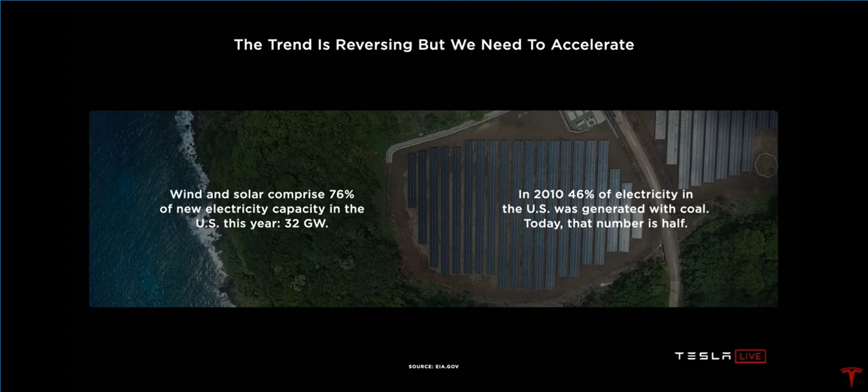So in terms of Tesla's contribution, we've delivered over 1 million electric vehicles, 26 billion electric miles driven, and many gigawatt hours of stationary batteries, 17 terawatt hours of solar generated. So I think solar is sometimes underweighted at Tesla, but it is a massive part of our future.

The three parts of a sustainable energy future are sustainable energy generation, storage, and electric vehicles. So we intend to play a significant role in all three. So to accelerate the transition to sustainable energy, we must produce more EVs that need to be affordable and a lot more energy storage while building factories faster and with far less investment.

So goal number one is a terawatt-hour scale battery production. So tera is the new giga, and a terawatt is 1,000 times more than a gigawatt. So we used to talk in terms of gigawatts. In the future, we'll be talking in terms of terawatt hours.

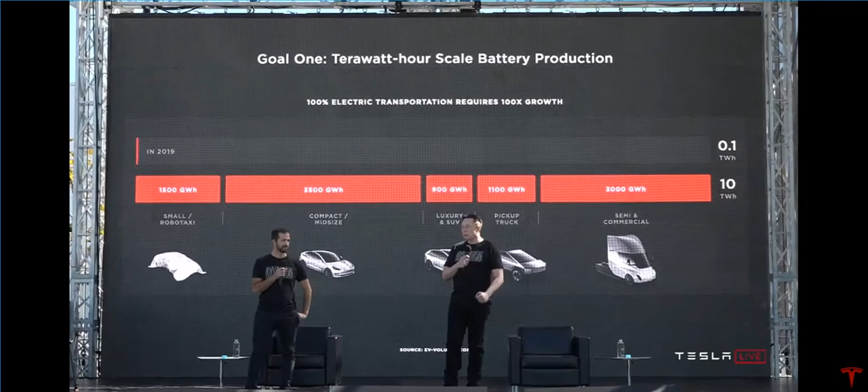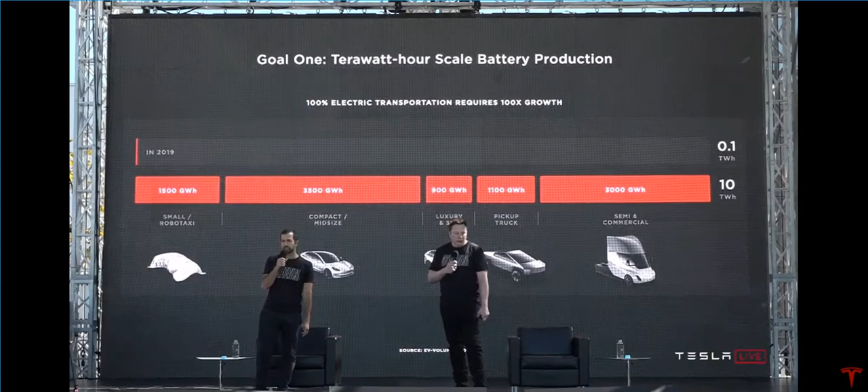So this is what's needed in order to transition the world to sustainability. Yeah, and you can see we're talking about 100x growth in batteries for electric vehicles to achieve this mission. And we are going to get there. It's just a matter of how fast, and our intention is to accelerate it.

Yeah, you basically need on the order of roughly 10 terawatt hours a year of battery production to transition the global fleet of vehicles to electric. And the average vehicle lasts 15 years, so we're talking about 150 terawatt hours, give or take, to transition all vehicles of all types to electric. Yeah, so it's a lot of batteries, basically.

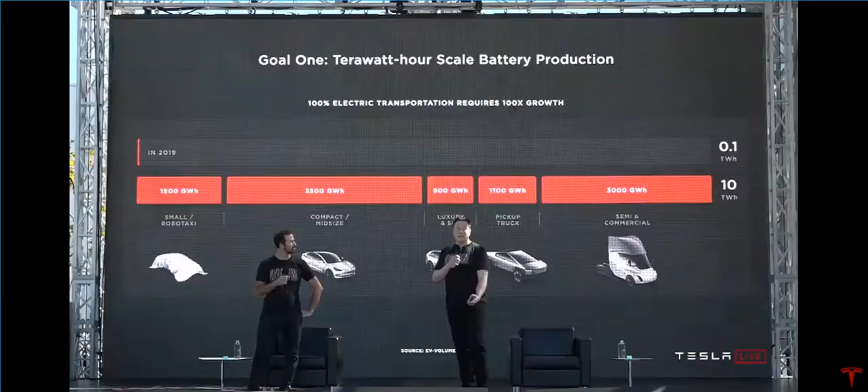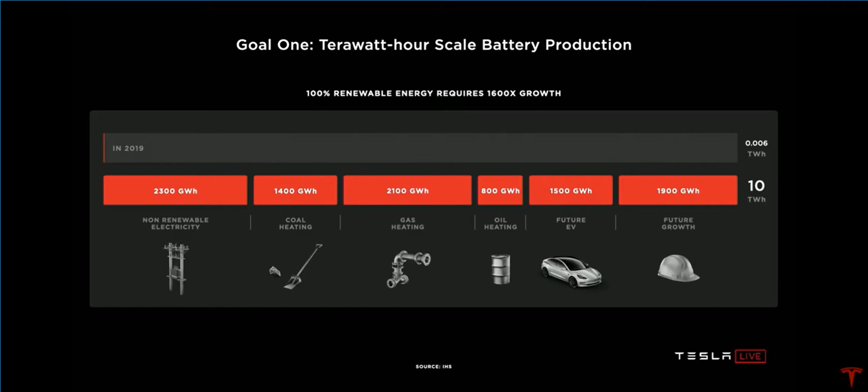And then on the grid side, we have a similar mountain to climb, 1,600 times growth from today's grid batteries to go 100% renewable on the grid and to take all of the existing heating fossil fuel uses in homes and businesses 100% electric.

And this number, I think, might grow even more, as the world economy matures and as countries with high populations industrialize, we could see this number be even more. But let's say it's like roughly 20 to 25 terawatt hours per year, sustained for 15 to 25 years to transition the world to renewable. This is a lot.

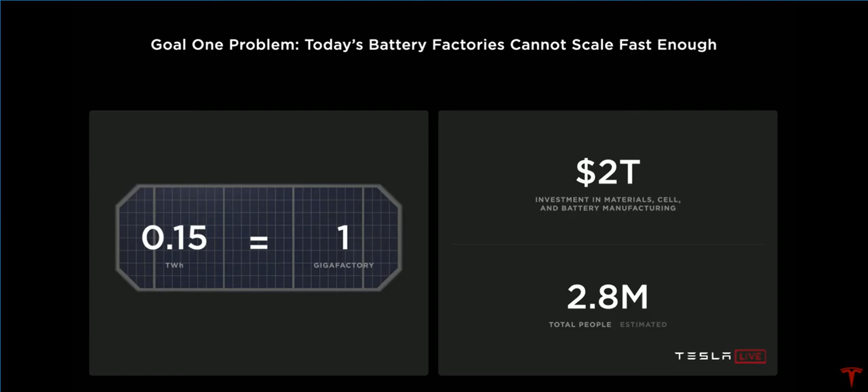So today's battery factories cannot scale fast enough. They're just too small. For Giga Nevada, 150 gigawatt hours per year is like what we probably expect to make out of there. But this is really pretty small in the grand scheme of things. That's only 0.15 terawatt hours.

And they cost too much. We would need 135 fully built-out Nevada gigafactories to achieve 20 terawatt hours a year. It's not scalable enough of a solution. We need a dramatic rethink of the cell manufacturing system to scale as fast as we can and should.

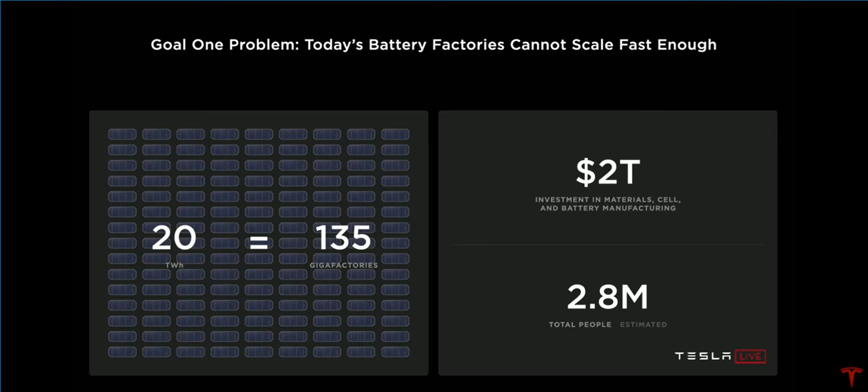I think we should view this as more than just a question of money. Money is sort of an ethereal thing, but it's really the amount of effort. You have a certain amount of effort, in terms of people and machines, and depending on how efficient that effort is, for a given amount of effort, you want the most amount of batteries. So it's not just a question of like, if we had $2 trillion, tomorrow you could make this. It's not that easy. You actually need to organize a massive number of people, build a lot of machines, build the machines that make the machines. And so it's incredibly important to have that effort yield the most number of batteries.

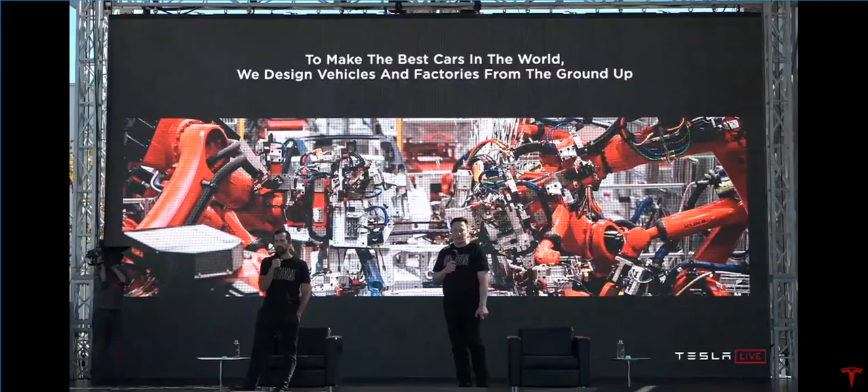To make the best cars in the world, we design vehicles and factories from the ground up. And now we do this for batteries as well.

It's weird, the slides don't show up quite right. Anyway, what shows up on the screen is not quite what shows up there. Oh, okay, it's different. Yeah, I think it's because that one's supposed to be current. Anyway, so let's get started.

We have a plan to halve the cost per kilowatt hour.

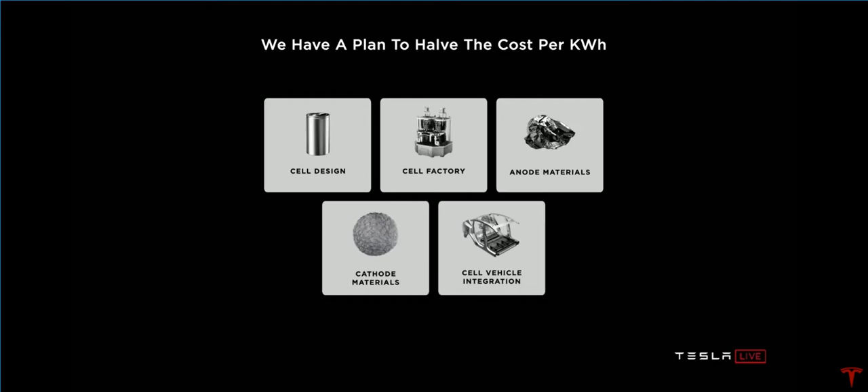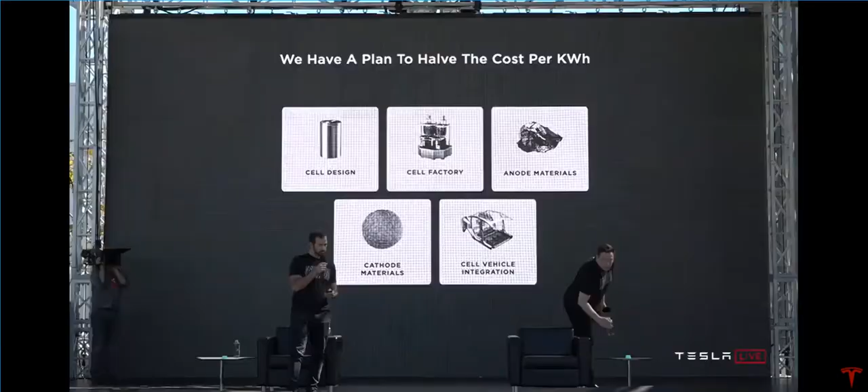And it's not a plan that rests on a single innovation, some research project that'll never see the light of day. It's a plan that has taken creative engineering and industrialization across every facet of what makes a cell into a battery pack, from raw material to the finished thing. And we're going to go through that plan with you today, step by step, and build up how we get to these goals and how we accelerate this transition and make our vehicles and our grid batteries more affordable.

We basically thought through every element of the battery, well, almost every element. There are a few more elements that we won't get to today, but we will get to in the future.

So first, before we get too far into it, let's talk about what is in a battery cell. We've got the cap and the can, negative and positive terminals of the cell. When you open that cell, you've got a tab connected to those terminals, what we call the jelly roll, which is the wound electrodes on the inside. You can actually see what this looks like as you unwind it. This is over 1 meter long in a typical 2170 cell, so it's quite a long winding process. And you can see the tab still there.

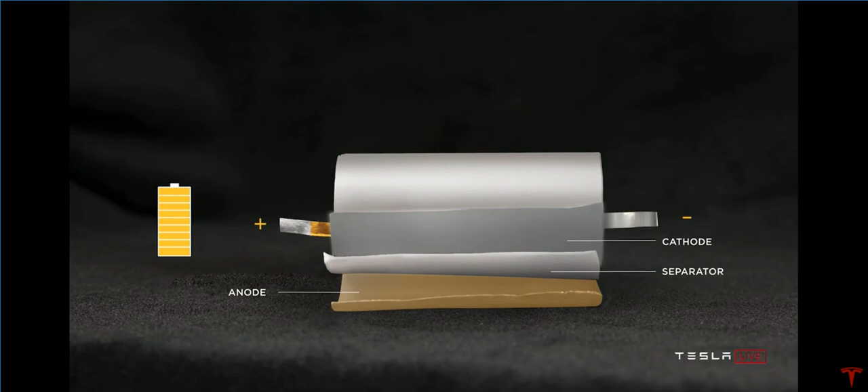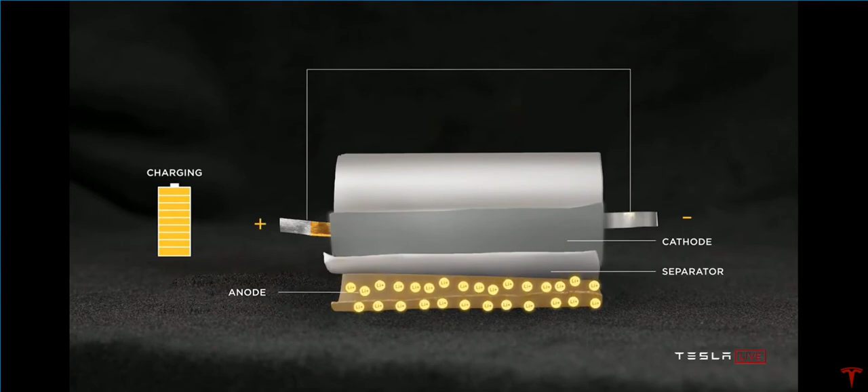To explain what's actually going on here, we've identified we've got anode, cathode, separator, positive and negative terminal. Watch what happens as we discharge the cell. Lithium moves from anode to cathode, and then the reverse: when we charge the cell, lithium moves from cathode to anode across the separator. This is the basis of what makes all lithium-ion batteries, no matter what the form factor is.

And when we look at what's happened to date, at least in our products, we've moved from the 18650 form factor to the 2170 form factor through great collaboration with our partners, Panasonic, new partners like LG and CATL, and probably others in the future.

Actually, a slight note on why it's called the 18650 versus the 2170: the first two digits refer to the diameter, and the second two digits refer to the length. That helps explain these weird numbers. But nobody could explain to me why there was an extra zero, so I said, okay, we're deleting the zero nobody can explain in future form factors. So technically it's the 21700, but going forward it's the 2170 because we just got rid of the extra zero since it's pointless.

This was an evolutionary step going from 1865 to 2170, bringing 50% more energy into the cell. But when we look to the ideal cell design, if we were to do it ourselves, we need to go beyond just what's in front of us and study the full spectrum of options.

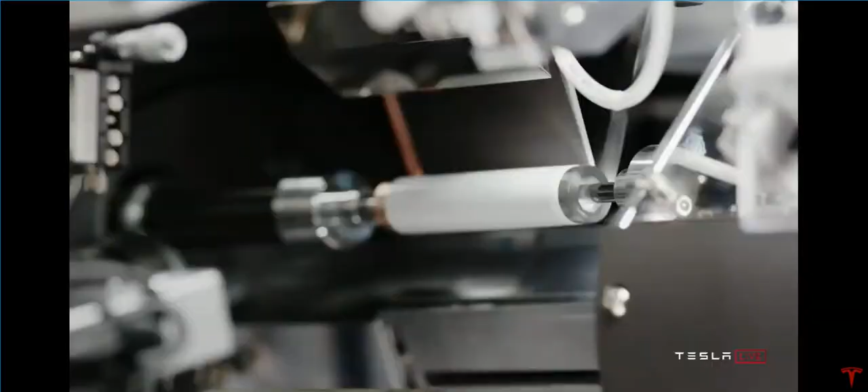I want to stress, this is not just a concept or a rendering. We are starting to ramp up manufacturing of these cells at our pilot 10 gigawatt hour production facility just around the corner. Here's a video of some of what's going on in the plant.

To be clear, it will take about a year to reach the 10 gigawatt hour capacity. This is important to appreciate - when you build a factory, there's a certain capacity that you design to, and then it takes some period of time to actually achieve that capacity. So I'd say it's probably about a year before we get to the 10 gigawatt hour annualized rate with the pilot plant. And this is just a pilot plant - the actual production plants will be more on the order of maybe 200 gigawatt hours, maybe more over time.

Let's stack up everything we just saw at the cell level. Just the cell form factor change enables a 14% dollar per kilowatt hour reduction - just that cell form factor change. And now that you've been teased on this factory, we're going to walk step by step through that factory and discuss a series of innovations there.

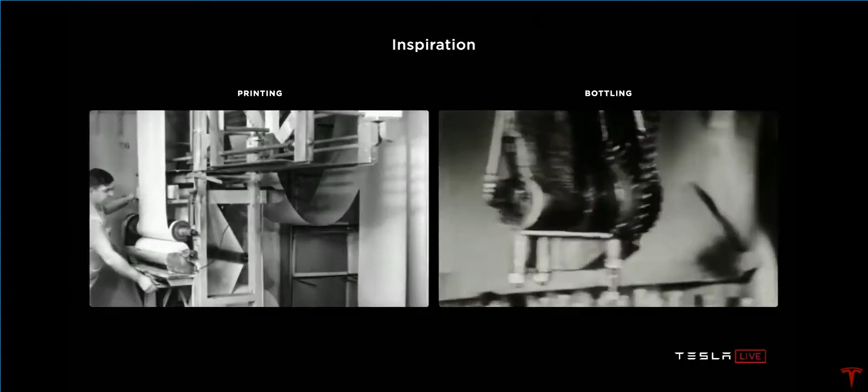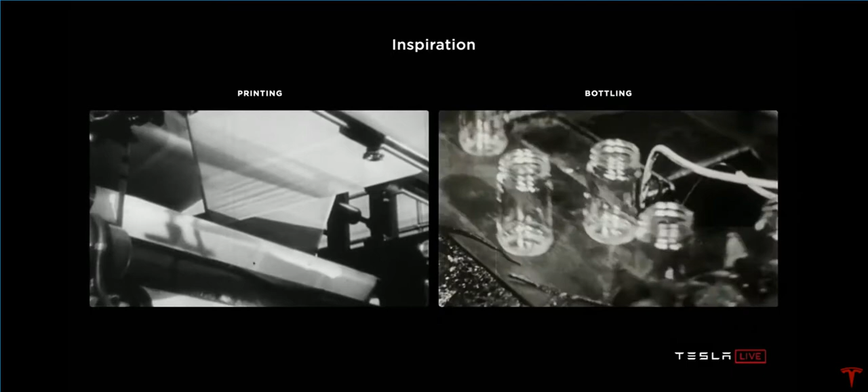When thinking about the ideal cell factory, we have inspirations behind us in the paper and bottling industry, where from humble beginnings, over a century of innovation has enabled mass scale, continuous motion, unbelievably low manufacturing cost. The lithium-ion industry, which is really only in its 3rd decade of high-volume production, has so far to go to achieve similar scale and simplicity. That was the inspiration we set out to the team as we thought about how to marry cell design and manufacturing in the best possible factory.

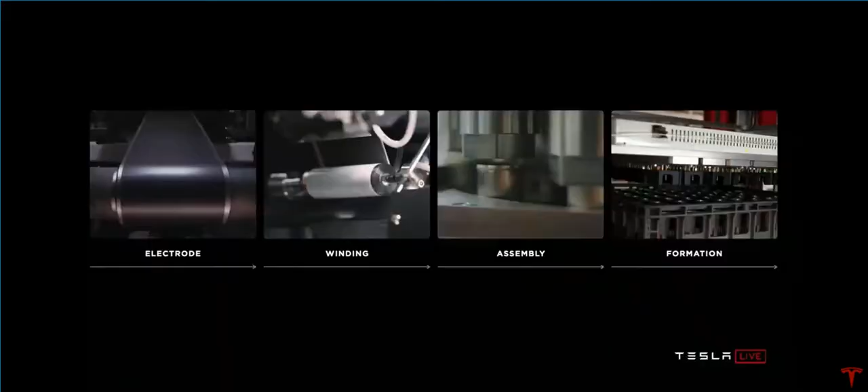Let's talk a little bit about what's in a cell factory. First, there's an electrode process where active materials are coated into films onto foils. Then those coated foils are wound in the winding process we just talked about, where if you do have tabs, you have to start and stop a lot. Then the jelly roll is assembled into the can, sealed, filled with electrolyte, and sent to formation, where the cell is charged for the first time, the electrochemistry is set, and the quality of the cell is verified. We set out at every step of this process to take that inspiration and think about how we make those processes fundamentally better and more scalable.

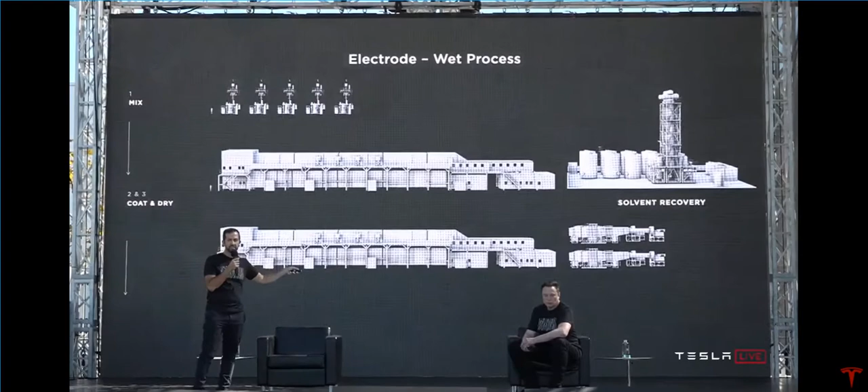One of the most important processes is where it all begins, the wet process of electrode coating. Just to give you a sense of scale, I'll walk through what's in that wet process. You've got mixing, where the powders are mixed with either water or solvents for the cathode. That mix goes into a large coat and dry oven, where the slurry is coated onto the foil - huge ovens, tens of meters long - dried, and that solvent then has to be recovered. You can see the solvent recovery system. Then finally, the coated foil is compressed to the final density. When you're looking at this, you think, wow, that's a lot of equipment for one step, especially when you consider that little speck next to the coating oven is a person. This is serious iron involved in making batteries.

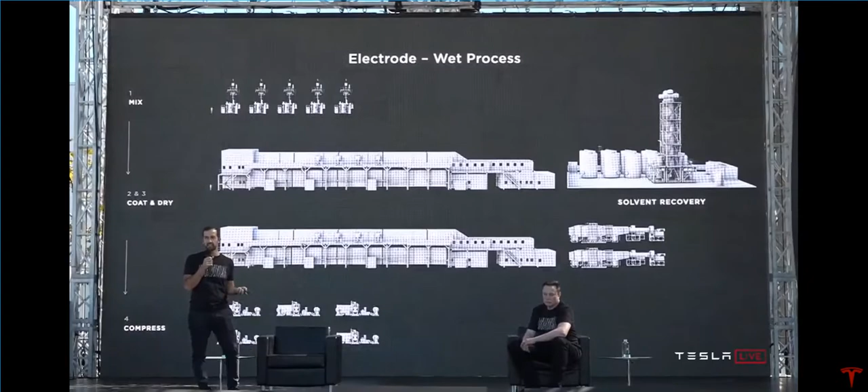Wouldn't it be great if we could skip that solvent step, which is one of those dig-a-ditch-and-fill-it-in kind of things, where you put the solvent in and then take it out and recycle it, and just go straight to dry mix to coat? That's what the dry process is really about. In its most basic form, you can see it here on a bench top - literally, powder into film, as simple as that. I mean, it's hard, actually, to be clear. If this was easy, everyone would do it. So it's not like dry coating electrode is actually easy.

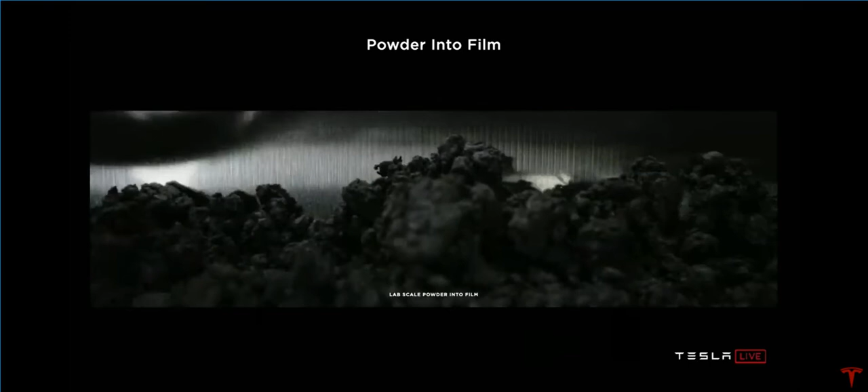It's actually very hard to do what appears to be a simple thing. And it's worth noting, we did acquire Maxwell a little over a year ago. It's certainly a good company, but the dry coating they had was sort of, I would call, proof of concept.

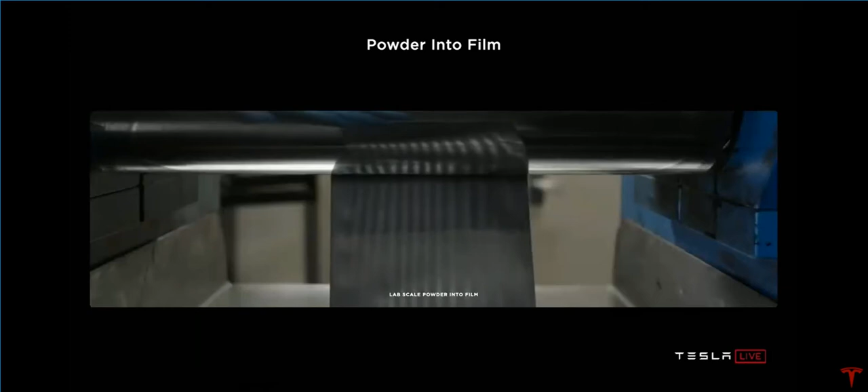Since the acquisition, we've actually revved the machine that does the dry coating 4 times. So we're on revision 4 post-acquisition, and there's still a lot of work to do. I would not say this is completely in the bag. As you go from benchtop to lab to pilot to volume production, there are major issues you encounter at every level. It's not like you make something work on your bench and bingo, now you can make a bazillion of it.

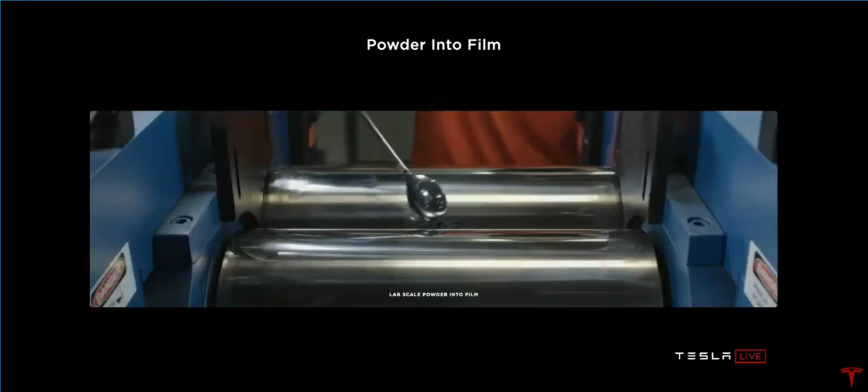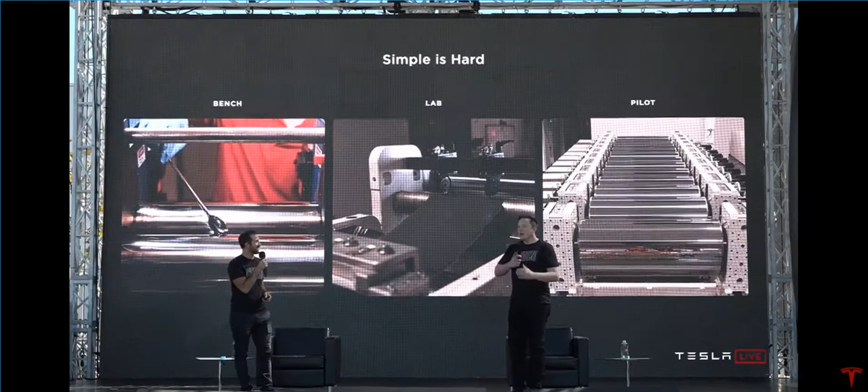I would like to not say that right now it's just totally working. It's close to working, but even now, at the pilot plant level, it's not quite there. Well, it's fair to say it does work, but with not a high yield.

We're still ironing out the kinks, but we've made tens of thousands of cells, thousands of kilometers of electrode. We're on the 4th generation of the equipment, so we've learned a lot along the way.

It's super demanding because every atom has its place if you want to deliver the energy density, the cycle life, and the supercharging. But we're confident we will get there, though it will be a lot of work along the way. There's a clear path to success, but a ton of work between here and there.

But this is a really profound improvement. For people that know battery manufacturing, this is gigantic. We'll probably be on machine revision 6 or 7 by the time we do large-scale production. The rate at which the machines are being improved is extremely rapid, like literally every 3 or 4 months is a new rev. And beyond the electrode, we continue to innovate on every other process step.

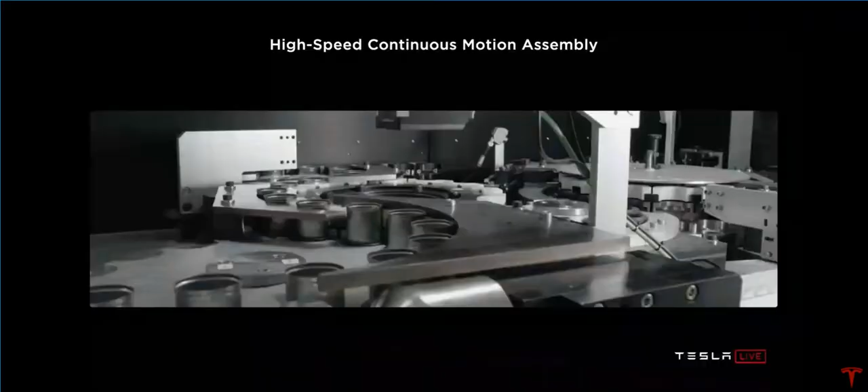So let's talk a little bit about assembly, which is next. The key to a high-performing assembly line is accomplishing processes while in continuous motion, thinking of the line as a highway: max velocity down the highway, no start and stop, no city driving. Exactly, no stoplights or traffic lights. You want the highway. I want the highway.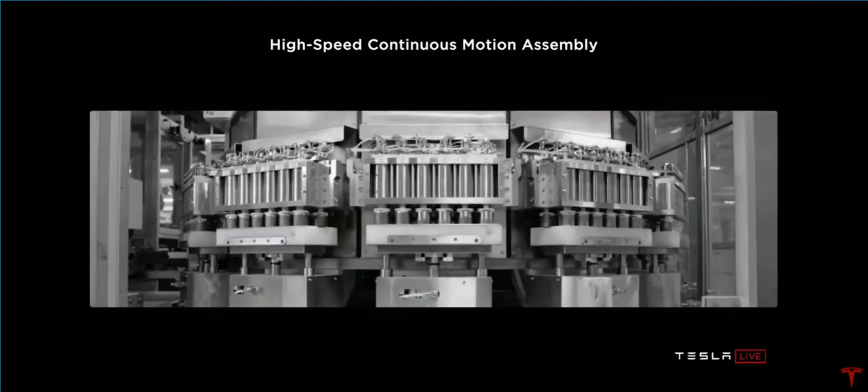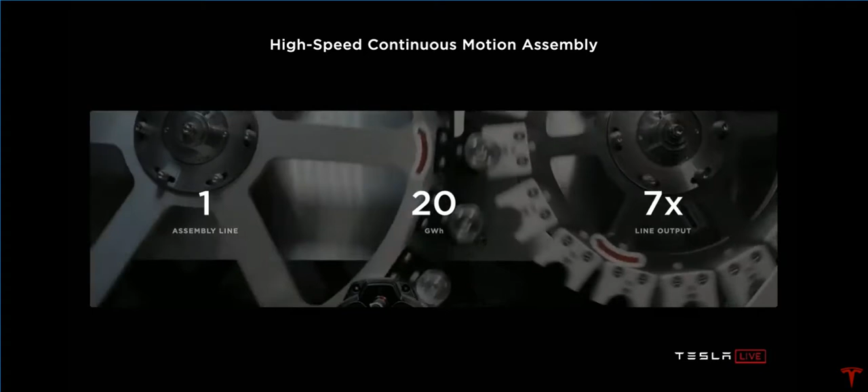Together with our internal design team that makes and designs this equipment, we coupled thinking about how to make the best cell with thinking about how to make the best equipment, so we could accomplish the fastest parts per minute rates on all of these tools. Through all of that development, we were able to implement assembly lines where one line achieves 20 gigawatt hours, a 7 times increase in output per line. When you're thinking about scalability and pure effort, having one line be 7x the capability is just effort multiplying.

You can think about the fundamental physics of a factory. It's actually quite a lot like the rocket equation, where you've got your exhaust velocity and the log of the start to end masses. So it's basically saying, how fast are things going, and what percentage of the factory volume is doing useful work. Conveyance does not count as useful work.

Only the value-added steps count. If you break the factory down into cubic meter sections, or smaller, like 1 liter sections, and ask, is a majority of this volume doing useful work, you would be astounded at how bad most factories are. They're like maybe 2 or 3%, including our factory in Fremont. I think it's possible to get to at least 10 times that volumetric efficiency, more like 30% ish, maybe more, and be 10x better, which means the factory can be 10 times smaller.

And then the other thing is, how fast are things going through the factory. It's like speed and density.

The faster you go—like if a factory that's moving at say twice the speed of another factory is equivalent to two factories basically—the company that will be successful is the company that with one factory can accomplish what other companies take 2 or 3 or 4 factories to do. So this is what we're trying to do here: how do we with one factory achieve what maybe 5 or even 10 factories would normally be required to achieve?

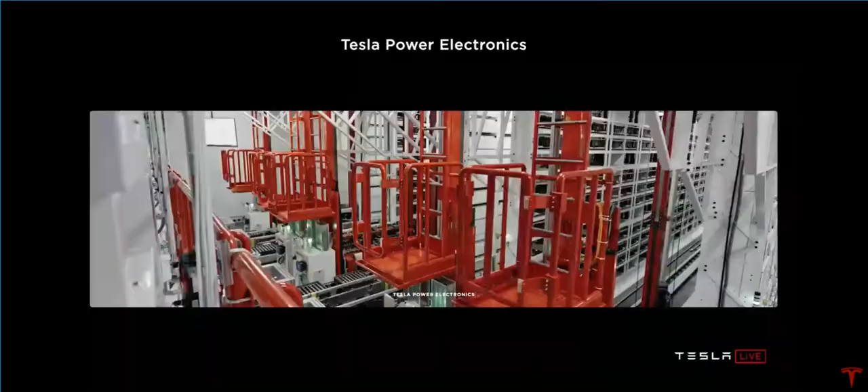Okay, now let's talk about formation. In a typical cell factory, formation represents 25% of the investment. And what is formation? It's charging and discharging cells and verifying the quality of the cell.

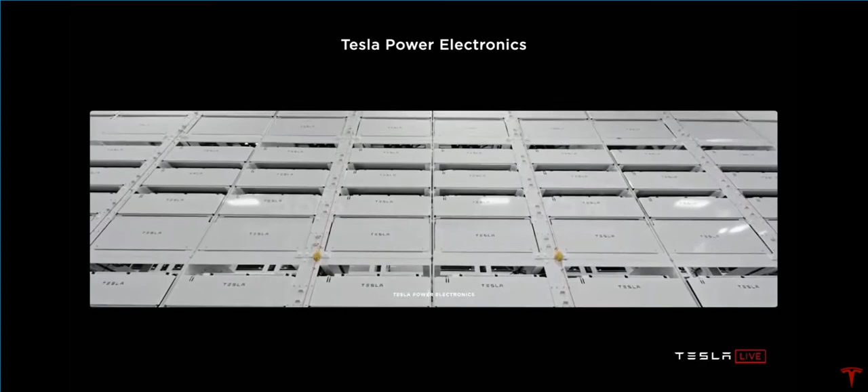Turns out we've charged and discharged billions and billions of cells in our vehicles, so we know a thing or two about that. The typical formation setup is you charge and discharge each cell individually. In our car, we charge thousands of cells at once. And we took our principle and our power electronics, leveraging Powerwall, vehicle battery management systems, and others, to dramatically improve the formation equipment cost effectiveness and density—86% reduction in formation investment, 75% reduction in footprint.

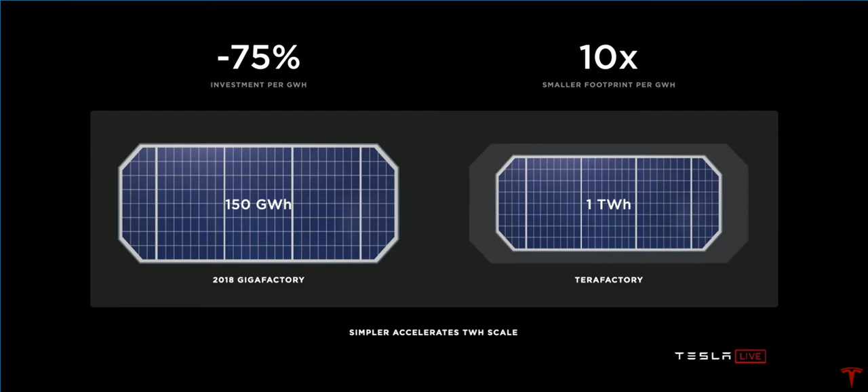Essentially, what this translates to, based on what we know today, is about a 75% reduction in the investment per kilowatt hour or gigawatt hour. It's just basically 4 times better than the current state of the art, to the best of our knowledge. And I think there's probably room to improve even beyond that. Definitely, yeah.

We're able to, from a volume standpoint, actually get, in a smaller form factor than Giga Nevada, many times the cell output. So you can see, basically we can get a terawatt hour in less space than it took to make a gigawatt hour—150 gigawatt hours. So this is pretty profound. I would actually not have thought this was possible several years ago, that we could actually get to terawatt hour scale in less space than what we currently envision for doing 150 gigawatt hours. So yes, simpler accelerates terawatt hour scale, and that's what we need to do to accelerate our mission.

And as Elon said, we're going to try to even improve on this as we push towards our goals. This is just talking about Tesla internal cell production. As I tweeted out earlier, we will continue to use our cell suppliers, Panasonic and LG and CATL. And so this is 100 gigawatt hours supplemental to what we buy from suppliers.

Essentially, this does reduce our weighted average cost of a cell, because it allows us to make a lot more cars and a lot more stationary storage.

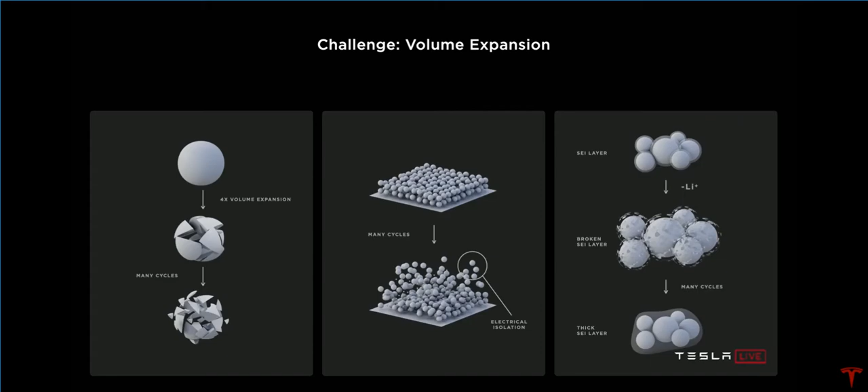The main reason is because the challenge with silicon is that it expands 4x when fully charged with lithium. Basically, all of that expansion stress on the particles starts cracking them, they start electrically isolating, you lose capacity, the energy retention of the battery starts to fade, and it also gums up with a passivation layer that has to keep reforming as the particles expand. Basically, with silicon, the cookie crumbles and gets gooey. That's basically what happens. Good analogy.

Current approaches to solve this, which exist—I mean, we have silicon in the cars you're all in right now—involve highly engineered, expensive materials in the scheme of things. Now, they're still great, and they enable some of the benefits of silicon, they just don't enable all of it, and they're not scalable enough. You can see some of the things you've maybe heard of, SiO, silicon with carbon, or silicon nanowires. That's kind of the space right now.

What we're proposing is a step change in capability and a step change in cost. And what that really is, is to just go to the raw metallurgical silicon itself. Don't engineer the base metal, just start with that and design for it to expand in how you think of the particle in the electrode design and how you coat it.

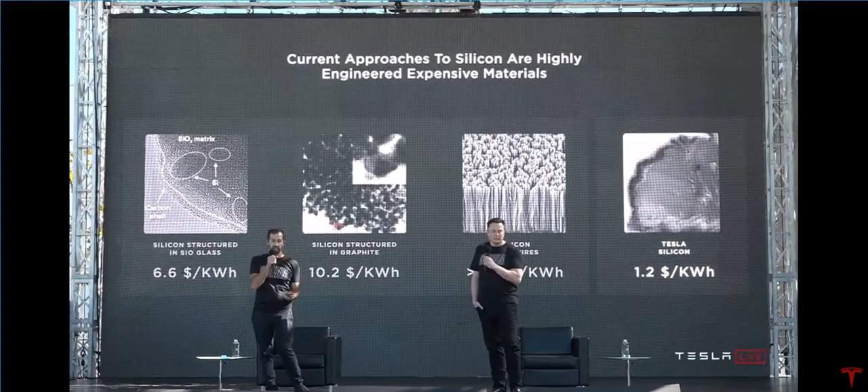I'm not sure if you saw this—basically, $1.20 per kilowatt hour. If you use simple silicon, it's dramatically less than even the silicon that is currently used in batteries made today, and you can use a lot more of it. The anode would cost, with this silicon, $1.20 a kilowatt hour.

And how does it work? Start with raw metallurgical silicon, stabilize the surface with an elastic, ion-conducting polymer coating that is applied through a very scalable approach—no chemical vapor deposition, no highly engineered high capex solutions—and then integrate it into the electrode through a robust network formed out of a highly elastic binder. In the end, by leveraging this silicon to its potential, we can increase the range of our vehicles by an additional 20%, just from this improvement. It gets cheaper and longer range.

When we take that anode cost reduction, we're looking at another 5% dollar per kilowatt hour reduction at the battery pack level. And there's more.

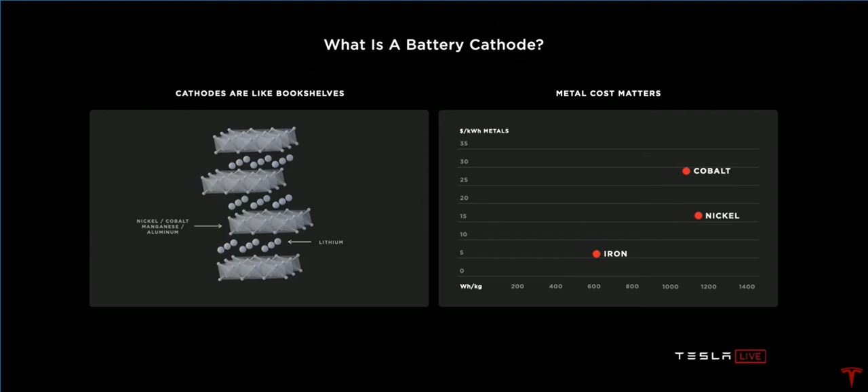Let's talk about cathodes. What is a battery cathode? Cathodes are like bookshelves where the metal—the nickel, the cobalt, the manganese, or aluminum—is like the shelf, and the lithium is the book. Really, what sets apart these different metals is how many books of lithium they can fit on the shelves and how sturdy the shelves are.

Cobalt is... it's tough to figure out exactly the right analogy to explain cathode and anode, but a bookshelf is probably a pretty good one, in the sense that you need a stable structure to contain the ions. You want a structure that does not crumble or get gooey, that holds its shape in both the cathode and the anode. As you're moving these ions back and forth, it needs to retain its structure. If it doesn't retain its structure, then you lose cycle life and your battery capacity drops very quickly.

People are always talking about what the cathode is going to be—is it NCA or whatever? The thing to consider is just fundamentally what the metals are capable of, and that's what we have on this chart: dollar per kilowatt hour of the cathode, just the metal using London Metal Exchange prices, versus the energy density of just the cathode. You can see nickel is the cheapest and has the highest energy density, which is why increasing nickel is a goal of ours, and really everybody's in the battery industry.

But one of the reasons cobalt is even used at all is because it's a very stable bookshelf, and the challenge with going to pure nickel is stabilizing that bookshelf with only nickel. That's what we've been working on with our high nickel cathode development, which has zero cobalt in it. Leveraging novel coatings and dopants, we can get a 15% reduction in cathode dollar per kilowatt hour.

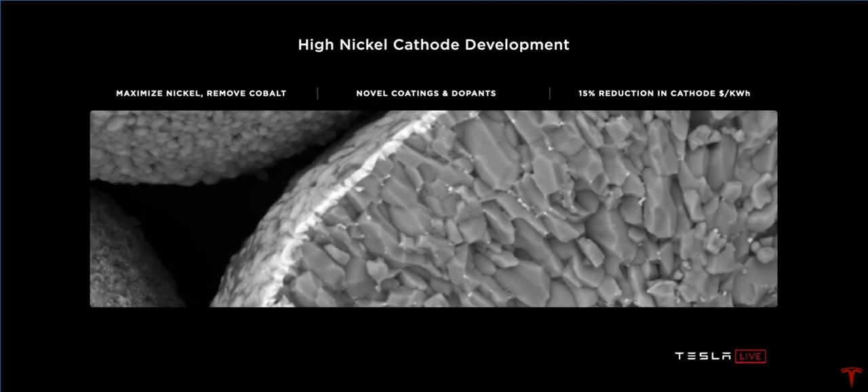Big deal. But it's not just about nickel. You want to? Yeah, sure.

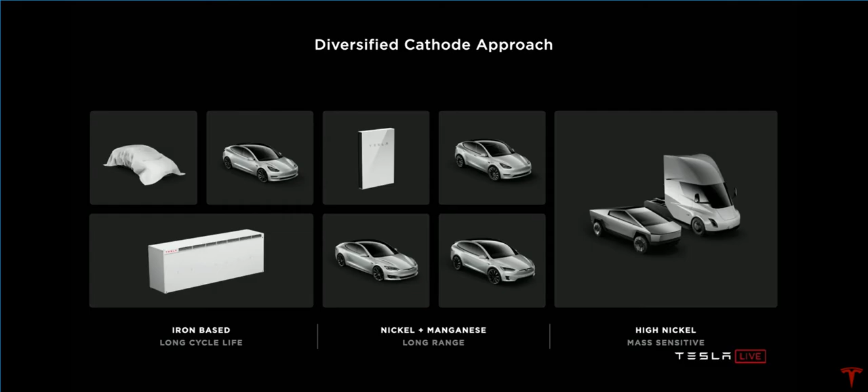So in order to scale, we really need to make sure we're not constrained by total nickel availability. I actually spoke with the CEOs of the biggest mining companies in the world and said, please make more nickel. It's very important, and I think they are going to make more nickel.

But I think we need a kind of 3-tiered approach to batteries: starting with iron for medium range, then nickel manganese as an intermediate, and high nickel for long range applications like Cybertruck and the Semi. For something like a semi truck, it's extremely important to have high energy density to get long range.

Just to give iron a bit more time - although if you look at watt-hours per kilogram at the cathode level, it looks like nickel is twice as good. But when you fully consider everything at the pack level, nickel is only maybe 50 or 60% better than iron. So iron is a little better than it seems when fully considered at the pack level. It's not as good as nickel - nickel is 50 to 60% better - but it's actually pretty good.

So iron is good for stationary storage and medium range applications where energy density isn't paramount. And then, like I said, for intermediate applications, it's kind of a nickel manganese approach.

It's relatively straightforward to do a cathode that's 2/3 nickel, 1/3 manganese, which would allow us to make 50% more cell volume with the same amount of nickel, with very little energy trade-off. You'd still want 100% nickel for something like a semi-truck, but really not much of a sacrifice at all.

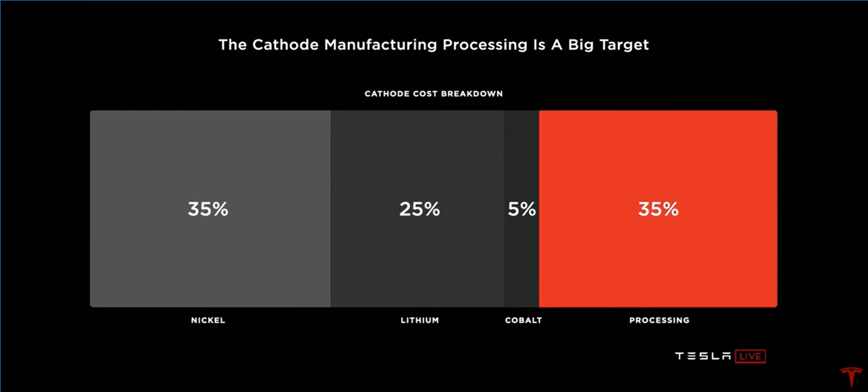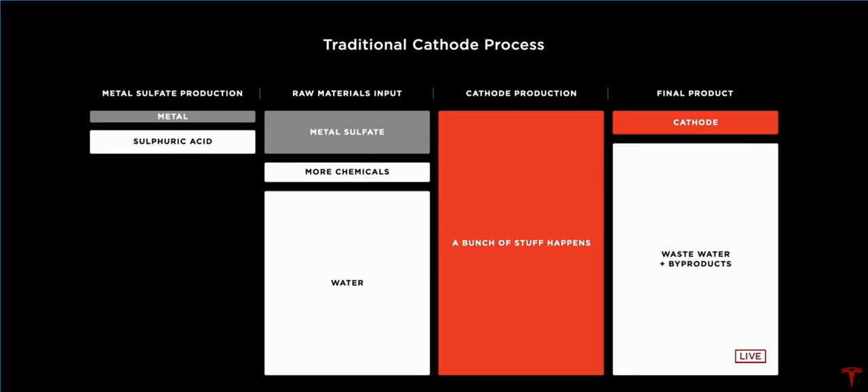It's insanely complicated. If you look at the total journey - like it's a small world journey of 'I am a nickel atom, what happens to me' - it's crazy. You're going around the world 3 times. There's like the moral equivalent of digging the ditch, filling the ditch, and digging the ditch again. It's total madness, basically. These things just grew up as legacy processes, done how it was done before, and then people connected the dots but never really thought about the whole thing from a first principles standpoint - how do we get from the nickel ore in the ground to the finished nickel product for a battery.

So we've looked at the entire value chain and asked how can we make this as simple as possible. That's what we're proposing here with our process - as you can see, a whole lot less is going on. We get rid of the intermediate metal sulfate step, go straight to the final cathode product, and recirculate the water with no wastewater at all. When you summarize all of that, it's a 66% reduction in CapEx investment, a 76% reduction in process cost, and zero wastewater - a much more scalable solution.

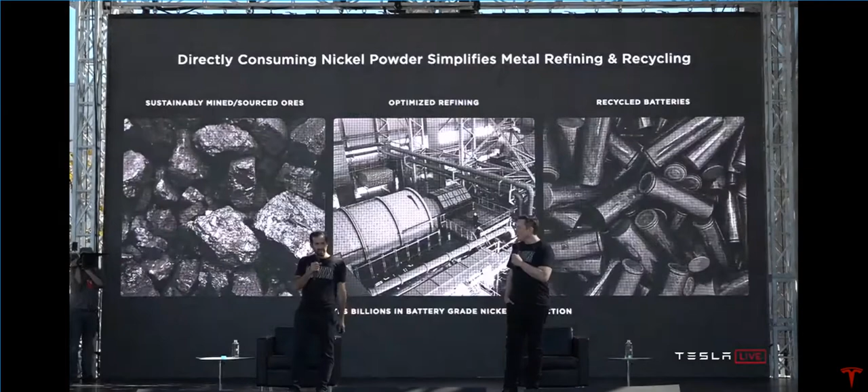When you think about the fact that now we're directly consuming the raw metal nickel powder, it dramatically simplifies the metal refining part of the whole process. So we can eliminate billions in battery-grade nickel intermediate production. It's not needed at all.

And we can also use that same process we showed on the previous page to directly consume the metal powder coming out of recycled electric vehicle and grid storage batteries. So this process enables both simpler mining and simpler recycling.

Now that we have this process, we're going to go build our own cathode facility in North America, leveraging all of the North American resources that exist for nickel and lithium. Just by localizing our cathode supply chain and production, we can reduce miles traveled by all the materials that end up in the cathode by 80%, which is huge for cost.

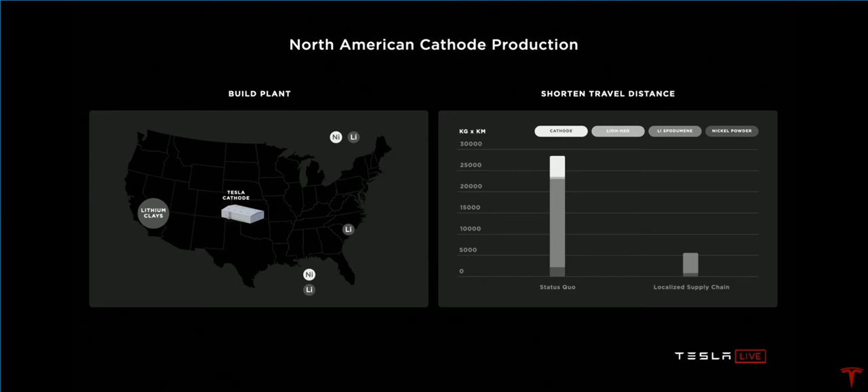To be clear, cathode production would be part of the Tesla cell production plant. So it would basically be raw materials coming from the mine, and out comes a battery. And the way the lithium ends up in the cell is through the cathode.

So then we should obviously do on-site lithium conversion as well, using a new process that we're going to pioneer. It's a sulfate-free process, again skipping the intermediate. That's a 33% reduction in lithium cost, and it's a 100% electric facility co-located with the cathode plant.

It's important to note that there is a massive amount of lithium on Earth. Lithium is not like oil. There's a massive amount of it pretty much everywhere.

In fact, there's enough lithium in the United States to convert the entire United States fleet to electric. All the cars in the United States, about 300 million of them, every vehicle can be converted to electric using only lithium that is available and discovered in the United States today. People really haven't even been looking, because it's just so widely available.

But it is important to ask: what is the smartest way to take the ore, extract the lithium, and do so in an environmentally friendly way? Looking at it from a first principles physics standpoint, instead of just the way it's always been done, we found that we can actually use table salt, sodium chloride, to extract the lithium from the ore.

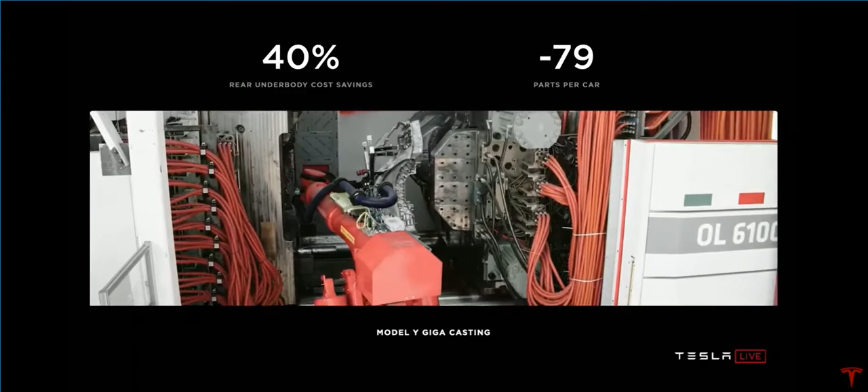Currently making the entire rear section of the car as a single piece, high pressure die cast aluminum. In order to do this, we actually had to develop our own alloy because we wanted a high strength casting alloy that did not require coatings or heat treatment. This is a big deal for castings, especially with a large casting.

If you heat treat it afterwards, it tends to deform — it kind of does this potato chip thing. So it's very hard to keep a large casting in its shape. There was no alloy that existed that could do this, so we developed our own alloy, a special alloy of aluminum that has high strength without heat treat and is very castable. That's a great achievement of our materials team.

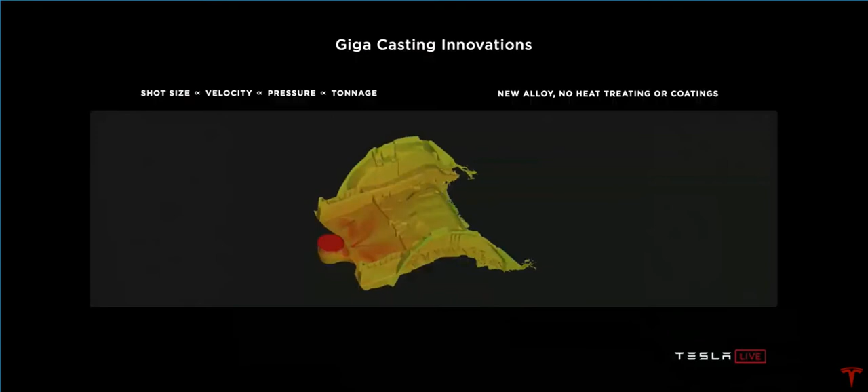In general, we've got a lot of advanced materials coming for Tesla — new alloys and materials that have never existed before. So we're basically making the front and rear of the car as a single piece, and then that interfaces to what we call the structural battery, where the battery for the first time will have dual use: both as an energy device and as structure.

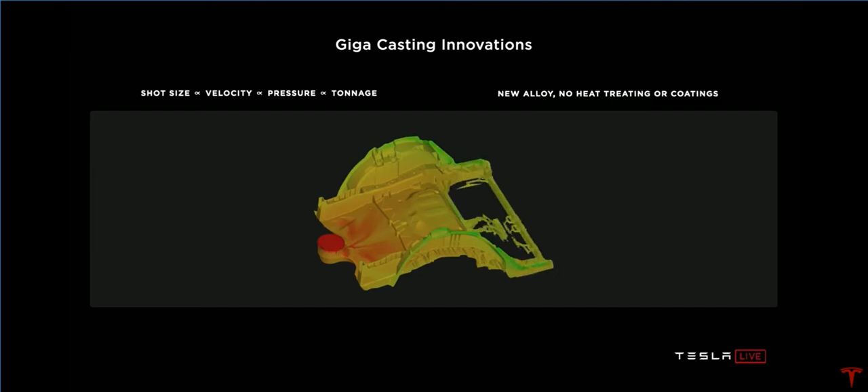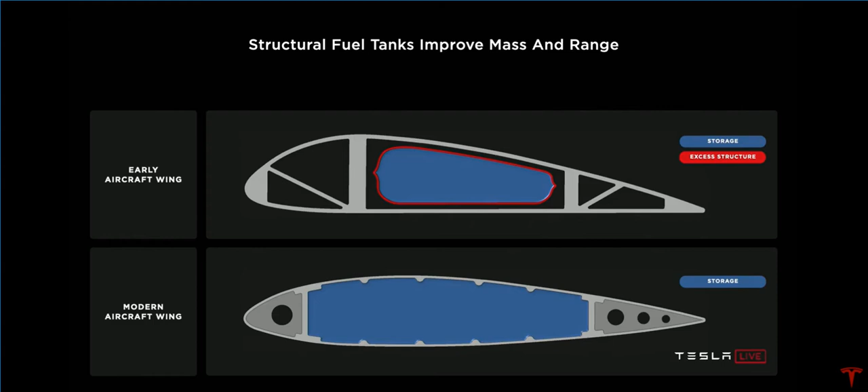This is absolutely the way things are done. In the early days of aircraft, they would carry the fuel tanks as cargo. The fuel tanks actually were quite difficult to carry — they were basically worse than cargo. You had to kind of bolt them down.

It was very difficult. And then somebody said, hey, what if we just make the wing tanks — what if we just make the fuel tank in wing shape? So all modern airplanes, the wing is just a fuel tank in wing shape. This is absolutely the way to do it. Then the fuel tank serves as dual structure, and it's no longer cargo — it's fundamental to the structure of the aircraft.

This was a major breakthrough. We're doing the same for cars. So this is really quite profound.

Effectively, the non-cell portion of the battery has negative mass. We save so much mass in the rest of the vehicle — more mass than the non-cell portion of the battery itself. So it's like, well, how do you really minimize the mass of a battery? Make it negative. Make the non-cell portion of the battery pack negative.

It also allows us to pack the cells more densely because we do not have intermediate structure in the battery pack. Instead of having supports, stabilizers, stringers, and structural elements in the battery, we now have a lot more space because the pack itself is structural. And what we do is essentially...

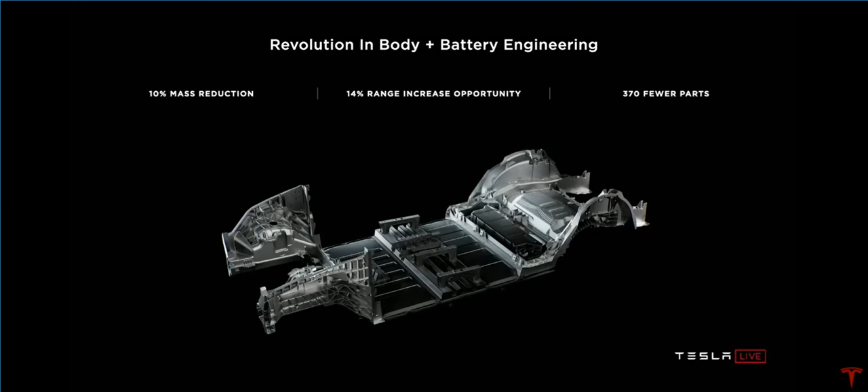I really think that long term, any cars that do not take this architecture will not be competitive. And it's not just a better product, but in the factory it's a massive simplification - you saw the part removal, the casting machines, the structural battery pack. We're looking at over 50% reduction in investment per gigawatt hour, 35% reduction in floor space, and we'll continue to improve that as we make the vehicle factory of the future.

So it's major improvements on all fronts, from the cell all the way to the vehicle.

In addition to the improvements we just said on enabling additional range and improving the structural performance of the vehicle, it is worth another 7% dollar per kilowatt hour reduction at the battery pack level, bringing our total reductions now to 56% dollars per kilowatt hour.

So stacking it up, we're not just talking about cost or range, we've got to look at all the facets. Range increase - we're unlocking up to 54% increase in range for our vehicles and energy density for our energy products. 56% reduction in dollars per kilowatt hour at the battery pack level, and a 69% reduction in investment per gigawatt hour, which is the true enabler when we talk about how we achieve this scale problem.